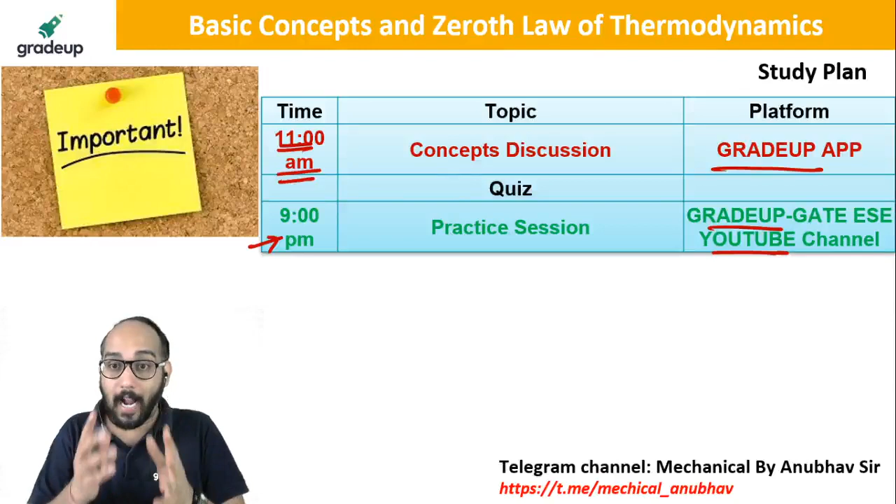Let us begin with the question. Today we'll be talking on basic concepts. Direct questions from basic concepts are very rare, but you can always expect questions from Zeroth law of thermodynamics. So in this session, we'll mainly talk about one of the most important topics, which can be used in first law, and sometimes in questions which combine first law and entropy - that is work transfer. This important topic we'll also take up in today's session. Let us start our discussion with the first question.

Okay, so this is question number 1. Let us go through it and try to understand. It will look a bit big, don't be afraid of it. It's just that they have given you a lot of data, so all you need to do is process this data and try to solve this question.

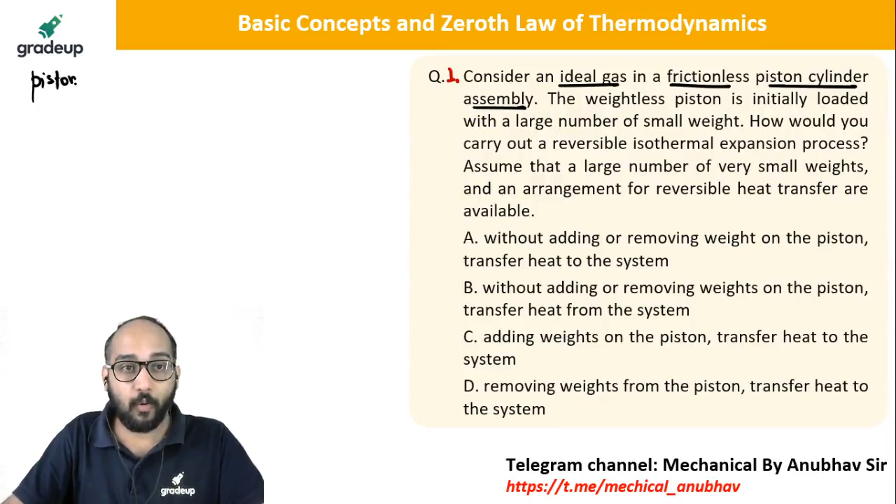Let us start. It says consider an ideal gas in a frictionless piston cylinder arrangement. As soon as I see it's a piston cylinder arrangement, I conclude that it is a closed system. Piston cylinder arrangement gives me a conclusion that it is a closed system.

Similarly, if it is frictionless, I can assume whatever process may happen can be assumed to be reversible. And what is the working substance?

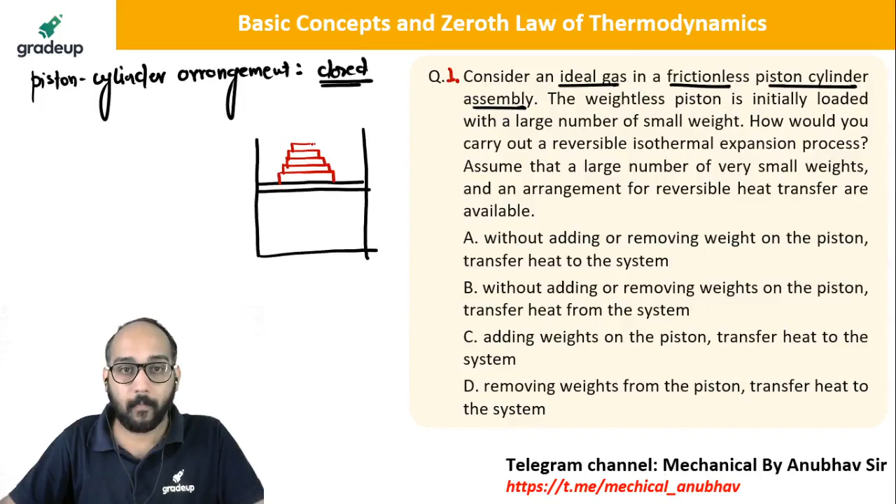Ideal gas. The weightless piston is initially loaded with a large number of small weights. So suppose this is the piston cylinder arrangement, and the piston is considered to be massless, and on this piston there are a large number of small weights, something like this.

Okay, how would you carry out a reversible isothermal expansion process? So this is what I need to carry out - a reversible isothermal expansion process. Assume that a large number of very small weights and an arrangement of reversible heat transfer are available.

What would you like to do? Would you add or remove weights, transfer heat? So transfer heat without adding or removing weight, simply add or remove weight, or without adding or removing weights, transfer heat from the system.

Now if you look from A to B, it is very important to observe what the option is. This is to the system, from the system. So direction of heat transfer is very important. Third, adding weights on the piston, transferring heat to the system. So it is now more specific, and removing weights from the piston, transferring heat to the system.

Now if you guys have attended the morning lecture at 11 a.m., we discussed this very important physical significance of isothermal process. If the temperature remains constant, what are the important points you can talk about? So isothermal expansion process is what we need to do.

So expansion means the volume has to increase. So from this initial state, what is the volume? The final state of the system, the volume should increase. So definitely the piston has to move in this direction.

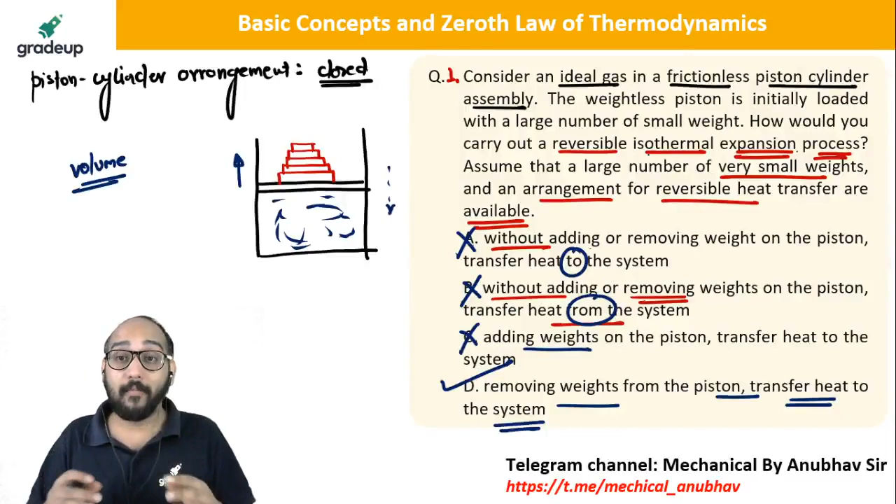Sometimes a question can be this easy. All you require is conceptual knowledge.

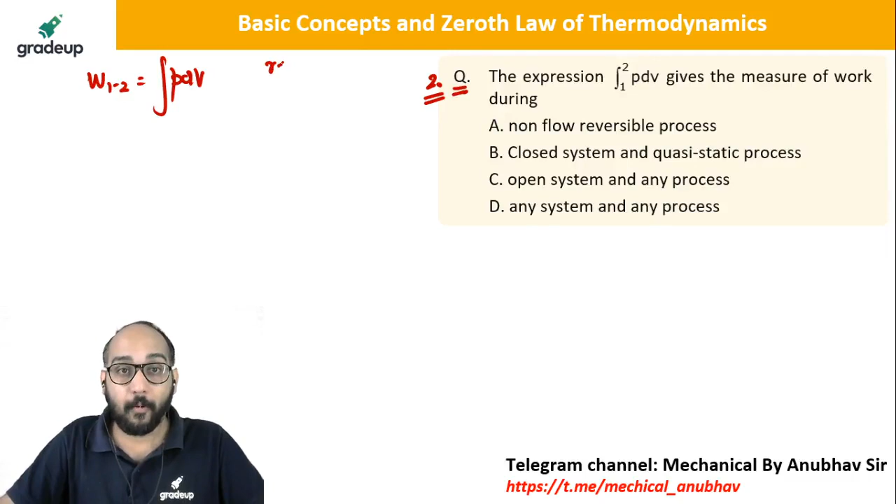It is valid when the process is reversible and undergoing in a closed system. The two big considerations are reversible and closed system. Which of the following matches it? Closed system is quasi-static reversible.

We have discussed that all quasi-static processes are reversible process - yes or no? Do all quasi-static processes are reversible process? The answer is no. But do all reversible processes are quasi-static? Yes. So I can consider this because all reversible are quasi-static.

Also, we have discussed in the morning class that, or you might be knowing, not necessarily that you have attended morning class, closed system mass remains constant.

Why? Because there is no mass transfer. So hence the closed system are also referred to as control mass. When they are referred to as control mass, they are also referred to as non-flow system. My dear friend, this is nothing but...

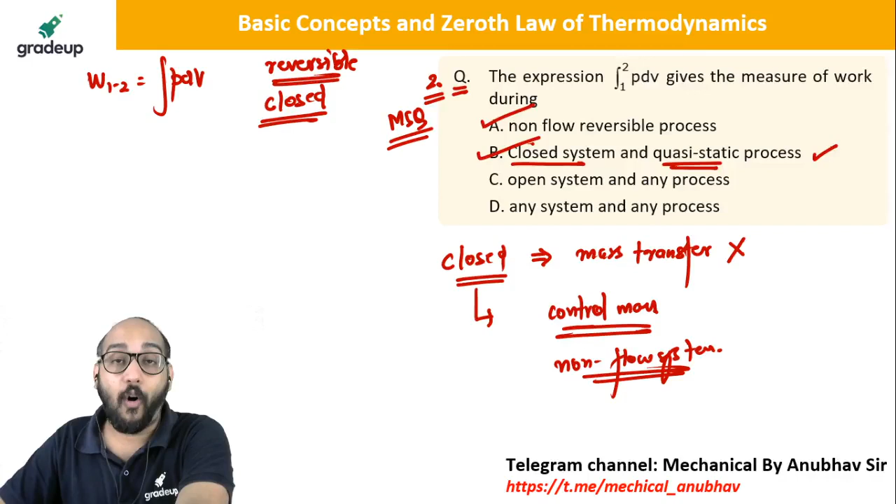This is an MSQ question. Okay, so both option A and B are correct. You might be thinking A, perfectly right. You might be thinking B, right. But A and B is the correct answer. This is an MSQ question. So you should always think about all the 4 options and try to eliminate them.

Next, let us now move to solve one question. Go through the question and try to think about it, how do we proceed to solve this question.

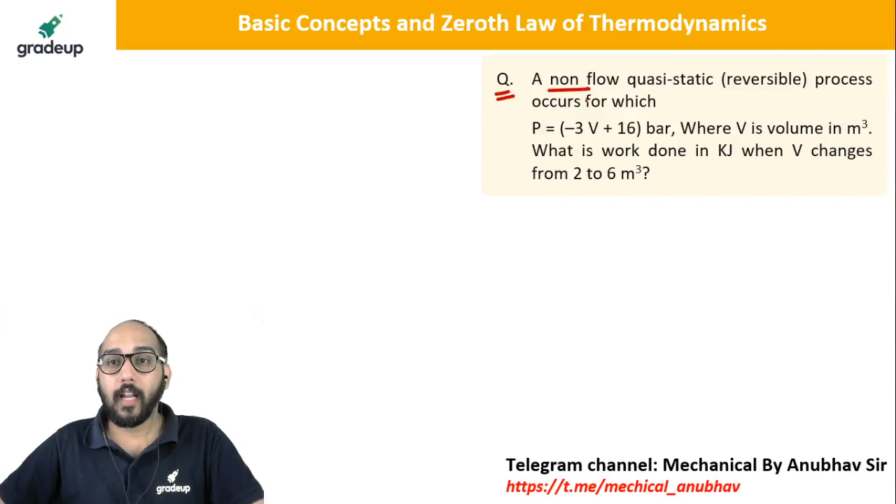It says that a non-flow quasi-static reversible process. So we have just discussed non-flow quasi-static reversible process. Work done is given as integral of PdV. Now in this case, the variation of pressure with respect to volume is given. Initial volume is 2, final volume is 6 meter cube. So V1 is 2 meter cube and V2 is 6 meter cube.

How do we solve? Do we know which is the process? If I don't know the process, I cannot apply the formula. So what is the way out? What is my thought process? This relationship - whenever you don't know about the process, try the general equation. Maybe you get the answer. So this is integral of the value of P, which is minus 3V plus 16, dV.

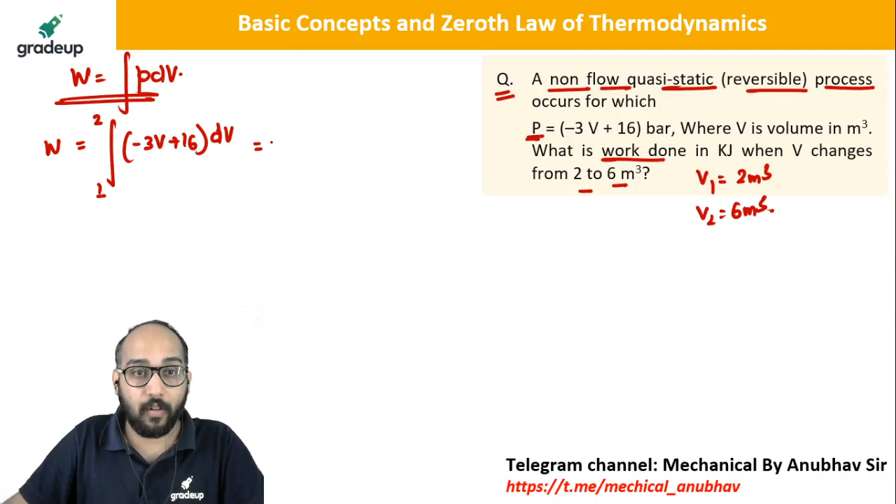Integral from point 1 to 2. What is this integration? If you do the integration, what do you get? Minus 3V square by 2 plus 16V, from 1 to 2. So if I put the values, what do I get? Minus 3 by 2, this is V2 square minus V1 square, plus 16 of V2 minus V1.

Now if I put the values, this is minus 3 by 2. V2 is 6, so 6 square is 36, minus V1 is 2, so this is 4, plus 16 of 6 minus 2. So this becomes 36 minus 4 is 32. So this is minus 3 by 2 into 32, plus 16 into 4. So this is 16 into minus 3 plus 4. So the answer that you get is plus 16.

But my dear friends, the calculation is easy, the relation is very easy. So answer is 16, sir. I'll put the value 16. Okay, done. Look, we have solved it. We have applied ourselves very clearly, very correctly.

But at the last, we have done one mistake. And it is not a mistake, it is a blunder, my dear friends. Sir, what is the unit of this? What unit do I write? Is it joule? Is it kilojoule? Is it bar? Is it what?

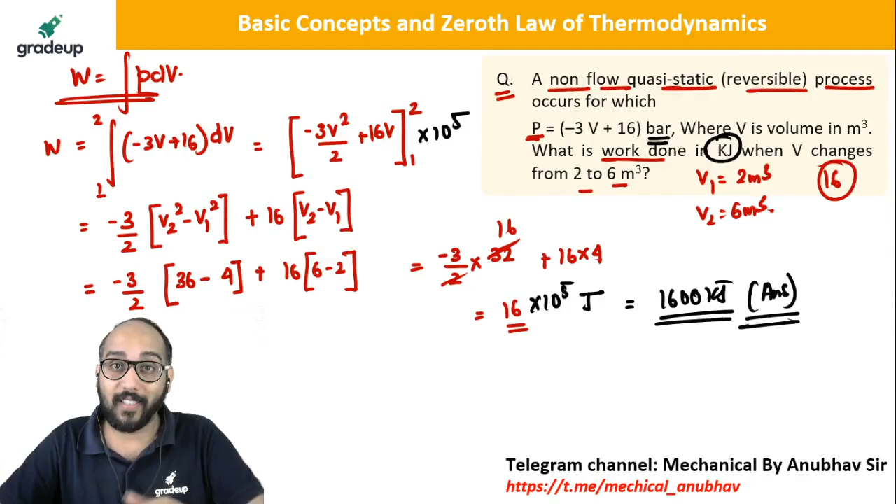So here bar is 10 to the power 5 factor. Okay, so this 10 to the power 5 factor will continue and you will get till this point. When you multiply as 10 to the power 5, the answer is joule. But what do you need in kilojoule? So answer is 1600 kilojoule. Okay, so great. So this is one form of work transfer, and we'll use it a lot in the upcoming session, maybe in today's session also. So wait and watch. Next.

So this is a very beautiful direct question from the basic concepts of thermodynamics, asked in GATE 2019, and you won't believe it is a 2-mark question. And they say, sometimes it was just a surprise out of the blue, suddenly they asked something which is not normal, and many students were stuck. Sir, is it this easy a question or am I missing some point? So in this dilemma, many students made a mistake. Many of them did it, but many of these students made a mistake also. Let us talk about it.

So if 1 mole of hydrogen gas occupies a rigid container with a capacity of 1000 liters. So there is a rigid container whose capacity is 1000 liters. So this is a rigid container, and inside this, say you have hydrogen gas. Okay, so this is H2.

What is the volume of this container? The volume is 1000 liters. Now can you tell me 1000 liters is how many meter cube? Because I don't deal with liters, at least in thermodynamics. I need to convert it into standard units. 1000 liters is how much? 1 meter cube. So the volume of the tank is 1 meter cube.

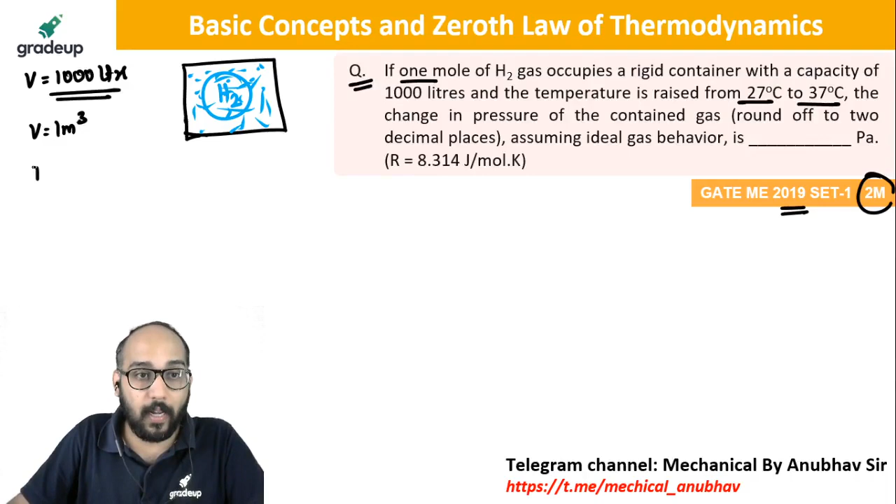So volume of hydrogen is also 1 meter cube. The temperature is raised from 27 to 37 degrees Celsius. So temperature T1 is 27 degrees Celsius, which is 300 Kelvin, and temperature T2 is 37 degrees Celsius, which is 310 Kelvin. The change in pressure of the contained gas, round it off to 2 decimals, assuming ideal gas behavior.

So what is the change in pressure? Change in pressure means I need to calculate P2 minus P1. This is what I need to calculate. And since it is given as an ideal gas, the first equation that strikes my mind is PV equal to MRT for an ideal gas. So if I want to calculate P2 minus P1, can I directly write this as MR times T2 minus T1 upon volume V? Since V1 is equal to V2, I can write it like this.

Now the problem here is I know volume, I know T1, I know T2, but I don't know mass and the value of R. If in this case, air as an ideal gas would have been given, then I can take the value of R as 0.287 kilojoule per kg Kelvin. But this condition is not given. It is not mentioned air, they have specifically mentioned hydrogen.

So this would be wrong, and this is the error that many of the students made, taking R as 0.287, because we have a habit: if nothing is given, we take R as 0.287. But here specifically hydrogen is mentioned, you cannot take the value of R as this. Then what do I do, sir?

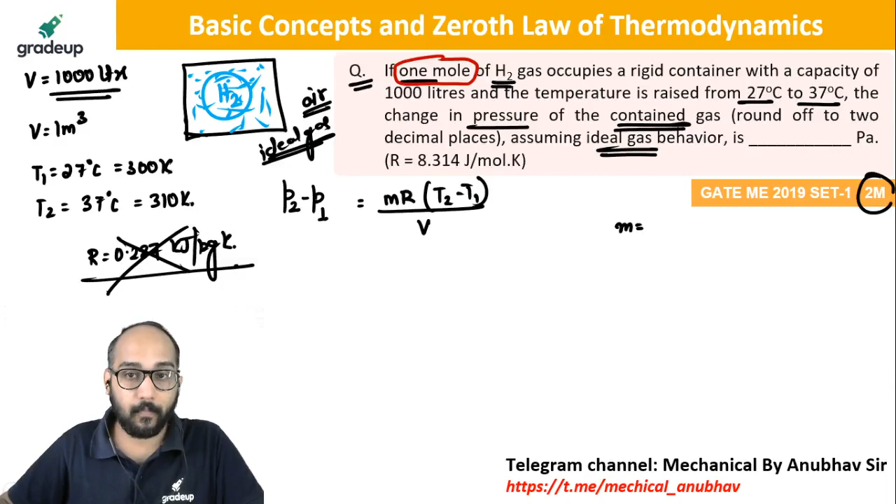So we go to the very basics of this. 1 mole is given. So the relation that I can use is, if you know it, recall it, if you don't, understand it now. Mass is given as the number of moles into the molecular mass. Number of moles is given as mass upon molecular mass.

So from here, what do we get? M is equal to number of moles into molecular mass. So if you want to calculate M into R, you write this as N into M into R, and this is nothing but the universal gas constant. This characteristic gas constant R is given as R bar upon molecular mass.

So these two fundamental points are being checked in this particular case, or many of you might already know that this relationship is directly valid. So just as a derivation, if anyone had a doubt, this is N into R bar into T2 minus T1 upon volume. Here this value of R is given as 8.314.

And here there was a lucky escape, and I'll tell you what. It was just by fluke, if somebody thought of something and it was lucky enough that it came out directly correct, I'll tell you what. The number of moles is 1. This is 8.314 into temperature difference of 10 upon volume 1. This is nothing but 83.14 Pascal, and that is your answer.

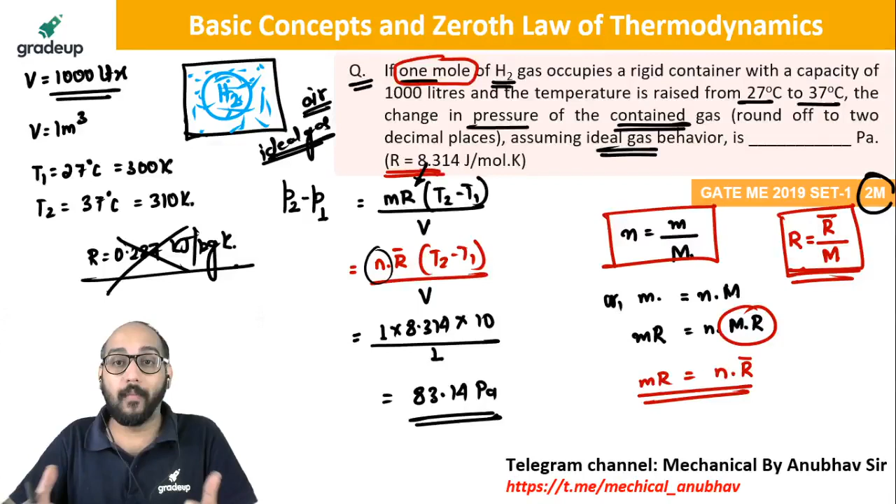Actually the number of moles was 1, some took mass as 1. R should be R bar, but the R value is given, so by luck, somebody used this value and got the correct answer. But we never know, my dear friends, that this concept next time can be used in a much more appropriate form, then no luck by chance. I hope you have got the concept.

Let's move on, next is a numerical type question. Let us discuss this. It says that a monoatomic gas undergoes an adiabatic process in which the pressure is increased by 1%, then the volume decreases by how much. So one thing first, in this question it is mentioned that the volume decreases, but in an MCQ type question, they can also give combinations where volume increases by some percentage or decreases by another percentage.

Okay, the first thing that you see, it is an adiabatic process with a monoatomic gas. If the pressure is increasing, you know what the slope is. In an adiabatic process, if pressure decreases, volume increases, or if volume increases, pressure decreases, they go vice versa. So in this case, if pressure is increasing, volume is bound to decrease.

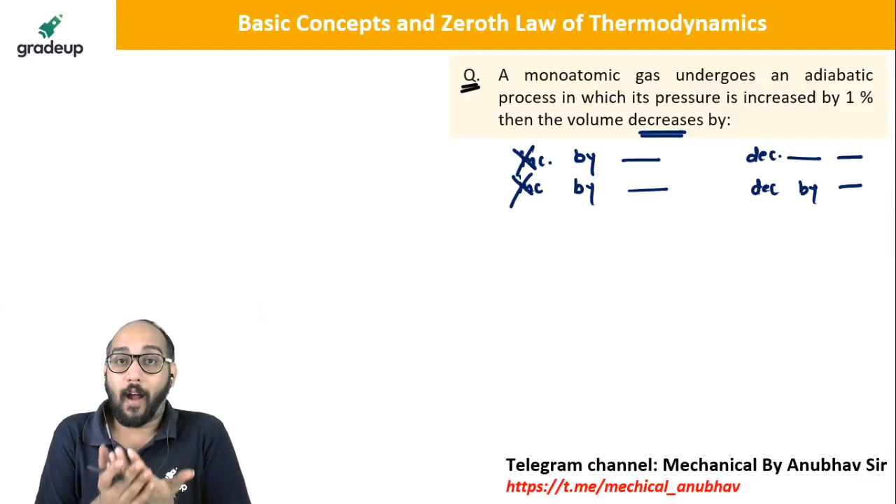So as soon as you see that volume increase option, eliminate it. These are small points that you have to always remember. You never know when this will help you. Let us solve this question.

Adiabatic process: PV to the power gamma is equal to constant. If I take log on both sides, this becomes natural log of P plus gamma natural log of V equal to natural log of constant. Differentiating, dP by P plus gamma into dV by V equals 0. From here, dP by P is equal to minus gamma into dV by V.

Now this data given increases by 1%. Percentage or increase means the increase value upon the original value - if you calculate change upon original into 100, you get the percentage. So increase upon original is nothing but change upon this. So dP by P is given as 1%. From here, if you want to calculate dV by V in percentage, what do we do?

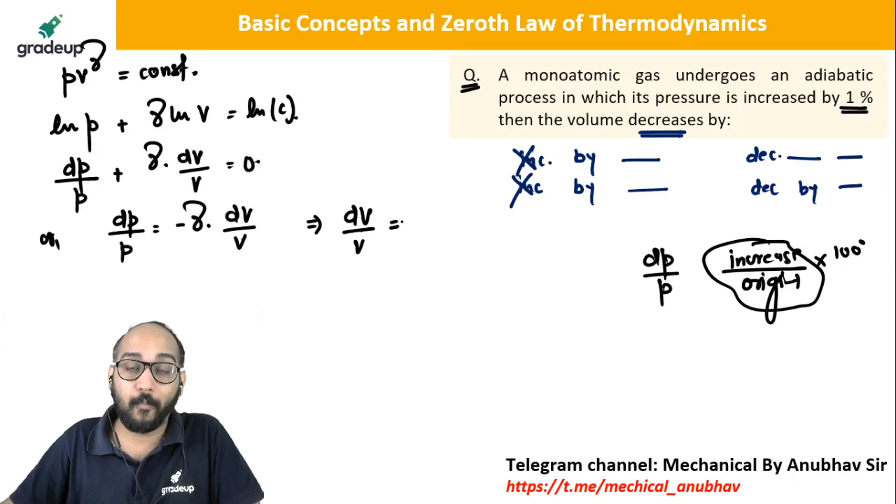So dP by P upon gamma with a negative sign. This negative sign indicates that volume is decreasing. We put the value 1 upon.

Now what is the value of gamma? It is given as monoatomic gases. I hope you remember that for monoatomic gases, the value of gamma is 1.667. For diatomic gases, the value of gamma is 1.4. And for polyatomic gases, the value of gamma is considered to be 1.3. If nothing is given, you take these values. If they have given you some data to calculate or a direct value, you observe that.

So this is 1 divided by 1.667. So this is minus 0.6%. This is your answer. So since they have already mentioned decreases by, in your GATE exam the value that you will type in is 0.6.

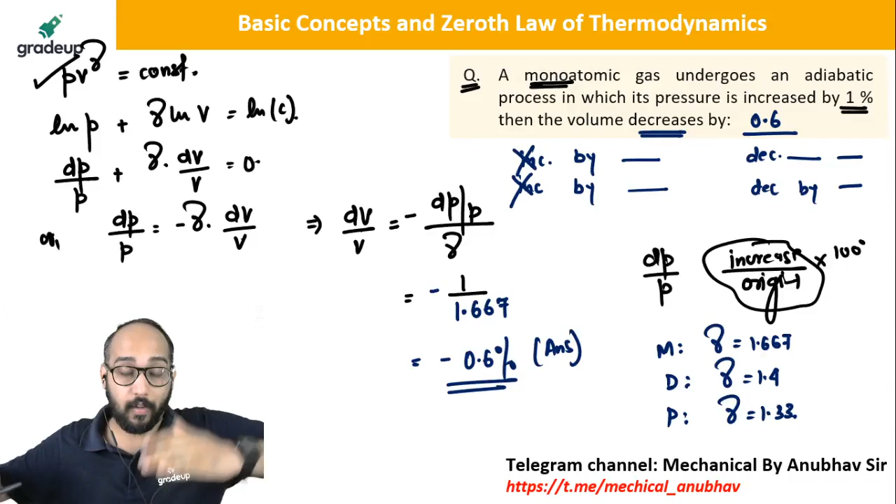Understood? So very basic question. What have we learned here? We learned the equation of adiabatic. We have also discussed that in an adiabatic process, slope is negative, which means if one value decreases, the another value - if one value increases, the another value decreases. Next, a very beautiful question, and this type is very much expected.

So you go through the question and see what are they asking.

The correct expression representing Z to be a thermodynamic property. Sir, I don't know - how many of you think that? Hello, are you seeing this question for the first time? Since this is being recorded, I won't know, but please do let me know in the comments. If you are someone seeing this question for the first time, after solving it please leave a comment - I'll check how you liked this question.

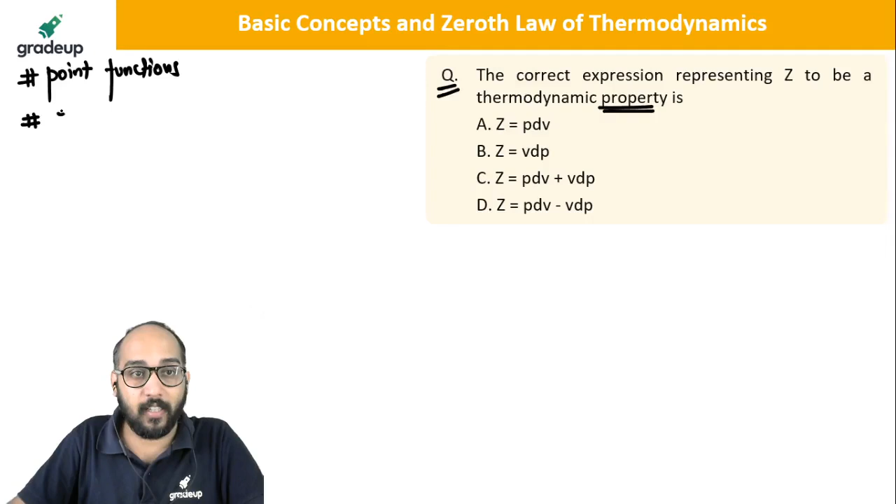Now, while doing the basic theory part, we have laid huge emphasis - I've told you again and again that this is very important - that if I say it is a property, property means these are point functions. Yes or no? All thermodynamic properties are point functions. And when they are point functions, they are exact differentials. Remember, I told you, these are exact differentials.

Now here, we will use a concept from mathematics to find out whether this Z is an exact differential or not. So any equation represented as m dx plus n dy - if it is represented like this, for Z to be an exact differential, for dz to be an exact differential, the condition is del m upon del y at constant x should be equal to del n upon del x at constant y. So if this condition is valid, then you say Z or dz is an exact differential. Hence, in thermodynamics, we can comment that it is a property of the system.

Now, if you look here, by looking at it I don't see it is in the form of mdx plus ndy. So obviously I'll have to calculate this, satisfy this condition for all four options. Try to satisfy - whichever satisfies would give me the answer. So I'll have to pick and choose if I am smart enough, and I know you all guys are smart enough too. So I see that this is not in the required form.

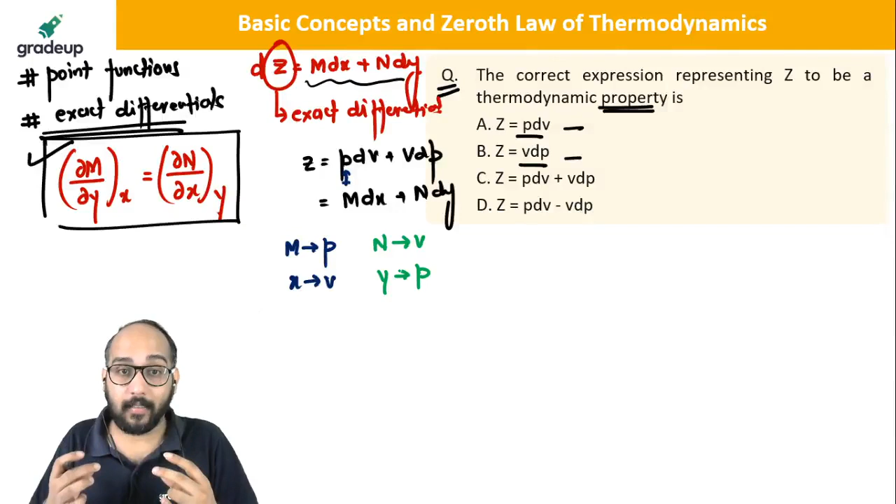Let me write and check. What do I have to prove? I have to check whether del M by del Y at constant X is equal to this or not. So if I try to calculate this, M is P. What is Y? Y is P. So del P by del P at constant volume. What value do you get? 1. Okay, this was left hand side.

Let us solve right hand side. Del N by del X at constant Y. N is V, writing V. X is V, writing V here. At constant Y, Y is P. This is also 1. So is left hand side equal to right hand side? Yes. So option C is the correct answer.

You will be saying, sir, you knew the answer, that is why you solved it. Let us talk about another one. Let us take option number D.

So this is given as PdV minus VdP. Compare with MdX plus NdY, this is what you need to compare. So on comparison, what do you get? M is P, X is V. On the other side, N is minus of V. So this is minus V. When you compare, this is minus V, and Y is P.

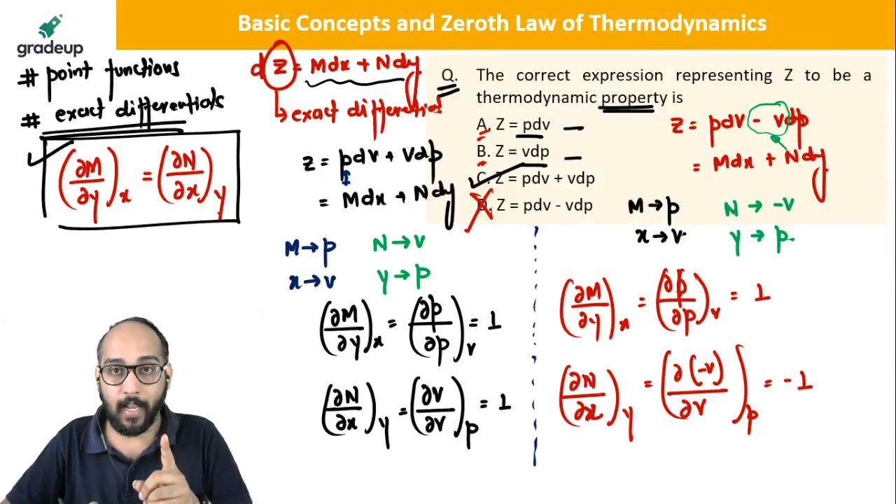Okay, you try it out for A and B, you'll get the answer. Please try it out and check whether you get it or not. Option C is the correct answer. So this was a very simple question. Next time they can give you a little difficult relation, but the thought process to solve such kind of question is this only. So please remember this, very much expected.

Now come to a very standard question for GATE exam. Very standard question. Helium in a piston cylinder assembly, closed system. What is the working substance? Helium, at 20 degree and 100 kilopascal, is brought to 400 Kelvin in a reversible polytropic process with exponent 1.25.

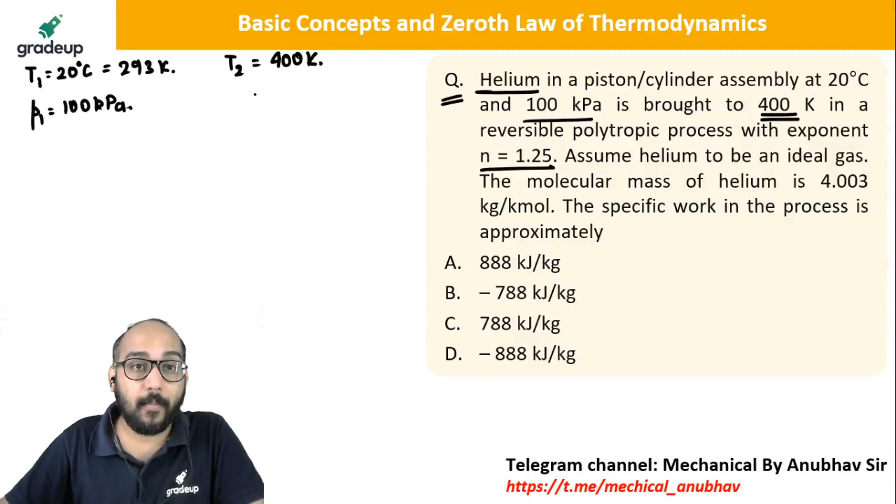The initial temperature is 20 degrees Celsius, which is 293 Kelvin, and pressure P1 is 100 kilopascal. The temperature is brought, T2 is brought to 400 Kelvin. Pressure I don't know, fine. It is a polytropic process, PV to the power n is equal to constant, where the value of n is 1.25. Assume helium to be an ideal gas having a molecular mass of 4.003 kg per kilomole.

What is the specific work in the process approximately? Now, I assume that you can solve this question. Would you like to solve it on your own or should I solve? I'll solve, okay, you continue parallelly. If you think you can solve, let us see whether you get the correct answer or not.

So it is a polytropic process. Work is asked, they are asking specific work per kg. The mass is 1. Now for a polytropic process, I know it is P1V1 minus P2V2 by n minus 1.

Now there are two approaches. One, a student who has worked very hard, knows all the concepts, but sometimes lacks problem solving ability. So what will he do? Sir, I know T1, I know T2, I know P1, I know n. Sir, I will calculate P2 by P1 is equal to what? Sir, T2 by T1, this would be n minus 1 by n. I can calculate P2, okay fine. So you get P2. What about V1, V2?

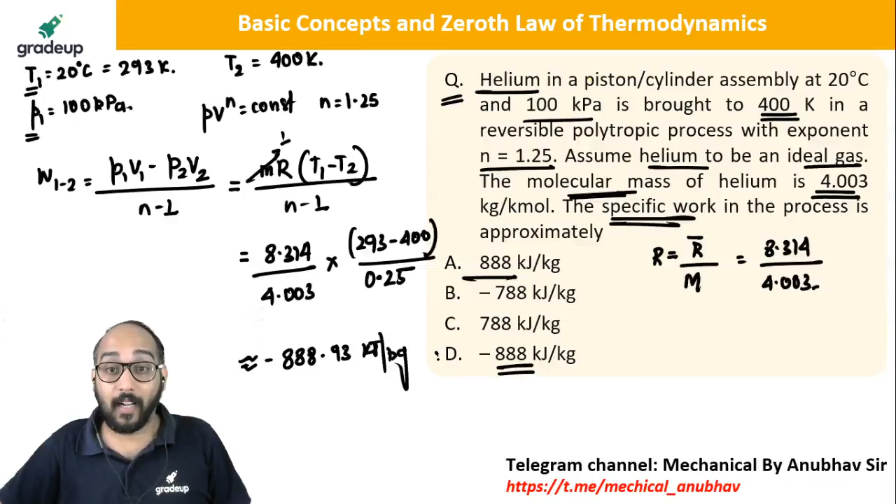If you make a mistake and write T2 minus T1, it's gone - you will get 888 and you'll be very happy thinking you're very smart, you've done it. But the correct option is option D. Understood?

Now, a very, very beautiful question. It's a slightly big question, you'll need some patience, but this is a type of question you always expect in a GATE exam, especially with the concepts of work transfer. Last time, not exactly 2021 but in 2020, a very beautiful question came on another approach like this - there they had used a spring. Last time a question did not come on this principle, but this year you never know, we are back with these kind of questions.

Okay, so two parts are asked. We'll try and calculate both these parts.

So the question says a piston cylinder arrangement as shown in the figure initially contains air at 150 kilopascal and 400 degrees Celsius. Sir, where is the figure? Yes, I don't see a figure.

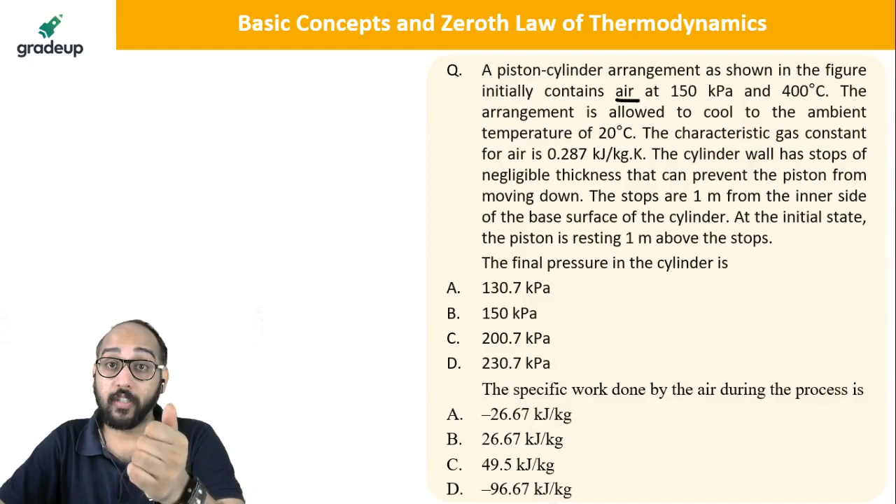Let me do a magic - figure. Okay, so air is inside in this piston cylinder arrangement. The initial pressure P1 is 150 kilopascal and the initial temperature is 400 degrees Celsius, so I am writing directly as Kelvin.

The arrangement is allowed to cool to the ambient temperature of 20 degrees Celsius. Okay, so the final temperature is 20 degrees Celsius, I'll just highlight it.

The characteristic gas constant R value is given. The cylinder walls have stops of negligible thickness that can prevent the piston movement below this point - so the piston can come down till this point, but it cannot go beyond this. The stops are 1 meter apart from the base of the surface.

At the initial state, the piston is resting 1 meter above the stops. So from here, the stops are 1 meter, from here it is 1 meter. Okay, this is the condition given.

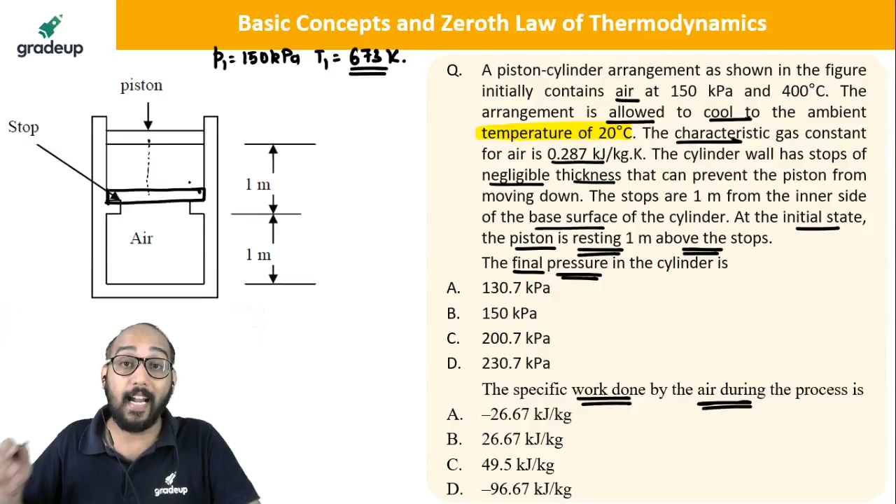So it is cooled down, from 400 degrees Celsius to a final temperature of 20 degrees Celsius. When it is getting cooled, initially the piston will come down, down, down, down till this state. So can I refer this state as 1 and this state as 2?

Beyond this, I don't know whether still heat is required to be discharged or rejected to achieve this final temperature or not. I don't know, but what I know is that beyond this, the piston cannot go. So when nothing is given, okay...

I can take 1 to 2 as a constant pressure process. It cannot be isothermal because temperature is decreasing, it cannot be adiabatic because heat is getting transferred, and it cannot be constant volume because the piston is moving. So logically, I would take this to be 1 to 2 constant pressure.

So if the pressure remains constant, P1 is equal to P2. If I take process 1 to 2 as a constant pressure process, and this is considered to be an ideal gas, can I write P1V1 upon T1 is equal to P2V2 upon T2? Since P1 is equal to P2, this cancels out, or I can write this as T2 is equal to T1 into V2 upon V1.

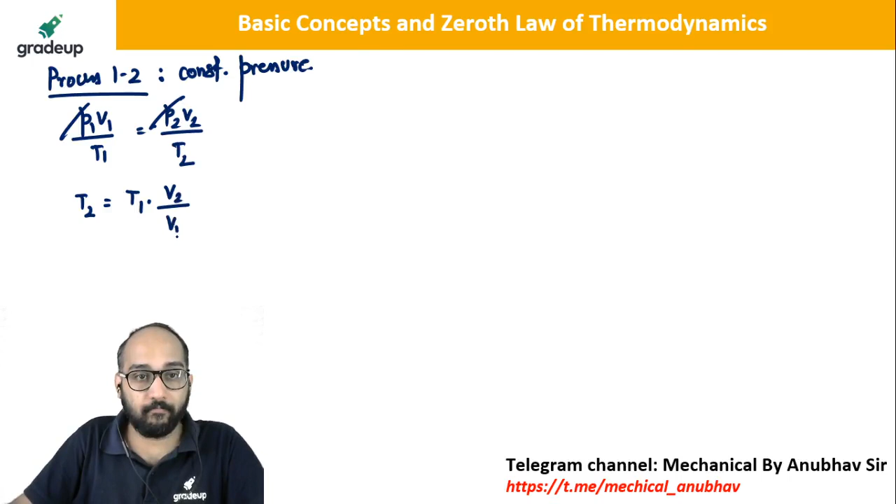Now I don't know what is the volume V2, V1. So this is a concept that was used in the previous year, as I said, 2020 May - how do you analyze the volume, or specifically when you want to calculate change in volume? Here we need to calculate the ratio of volume. So how do we go about it?

So what is volume V1? Volume V1 is this whole volume of the gas, this whole volume of the gas, this whole volume. So if I consider area A, then area into perpendicular height gives me the volume.

Yes or no? So for volume V1, can I write T1 is 673, and volume V1 is A into 2? Why 2? Because this is 1 meter, this is 1 meter. But for state 2, what would be the volume V2? Only this much.

Only this much, this is your volume V2, which is area into length 1 meter. This is area into 1, area cancels. Now how much is this coming? 673 divided by 2 - if you do the calculation, what do you get? 336.5

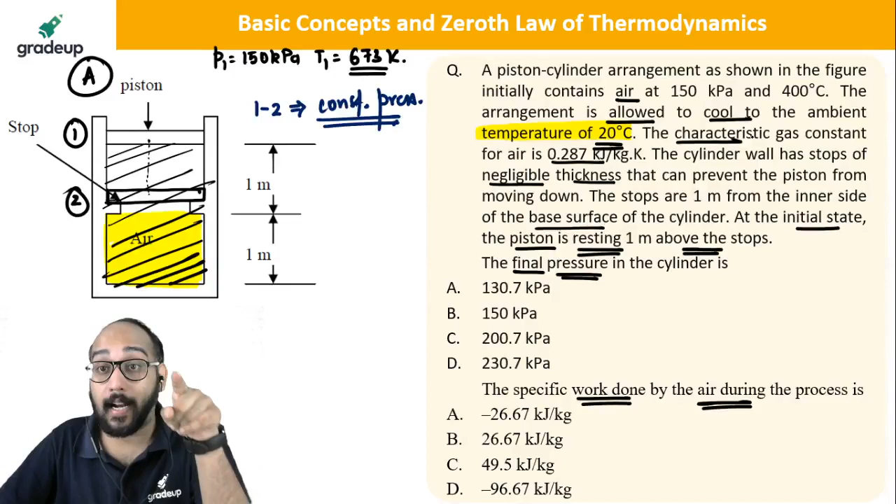Kelvin. And what I see from this value is that this is not 20 degrees Celsius. They have given you in the question that it is allowed to cool to the ambient temperature of 20 degrees Celsius. So further cooling has to be done, which means beyond this, whatever happens, it is a constant volume process.

So process 2 to 3 is what? Constant volume. If it is constant volume, I can write P2 V2 upon T2 is nothing but P3 V3 upon T3. V2 cancels out with V3. So from here, I can calculate the value of P3, which is nothing but T3 upon T2 into P2.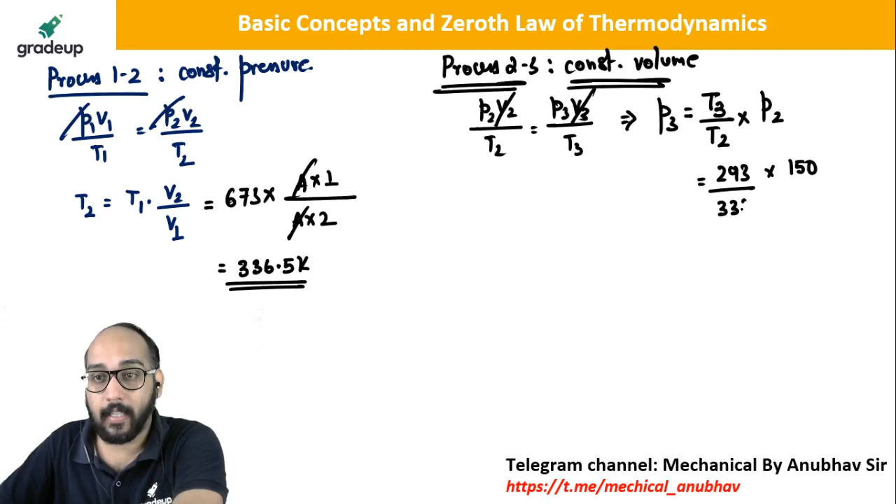Now P2 is equal to P1, so it is 150 kilopascal. Now what is the final temperature T3? 20 degrees Celsius, so this is T3 final state. So T at 20 is 293, and this value is 336.5. So very quickly, come on, calculate and write.

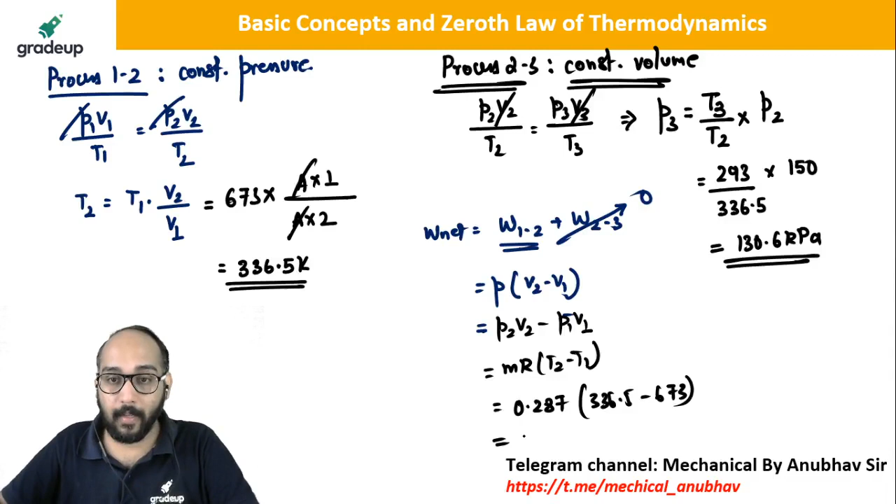336.5 minus 673. How much do you get, my dear friends? Minus 96.57 kilojoule per kg. And what does the negative sign indicate? That work is done on the system and not by the system. Minus 96.67, option number D is your correct answer.

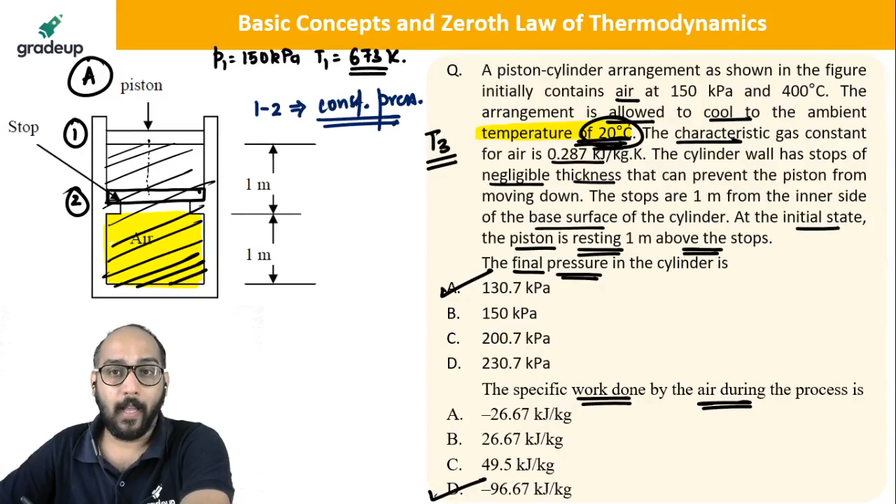Okay, so these are a few questions on work transfer. Let us now shift our focus to zeroth law of thermodynamics. Okay, so we all know what is zeroth law of thermodynamics.

A equal to B, B equal to C, so A is equal to B. Okay, so A is equal to C. The physical significance we have understood. Let us try and apply this to solve a question on numerical. So go through it.

The thermometric property X - so we have understood, we know what is thermometric property. X of a thermometer varies with temperature T. And what is the relationship? T is equal to AX square plus B. We know that to measure temperature, first we need to measure thermometric property which is dependent on temperature, and that property is known as thermometric property, and this whole principle is known as thermometric principle.

Now the value of X in centimeter is given at two different points, at ice point and at steam point. So at ice point, 0 degrees Celsius, and steam point, 100 degrees Celsius, the value of X is 5 and 20 centimeter respectively. So what is the temperature when this thermometer is giving you the value of thermometric property as 15 centimeter? What is the temperature of this body?

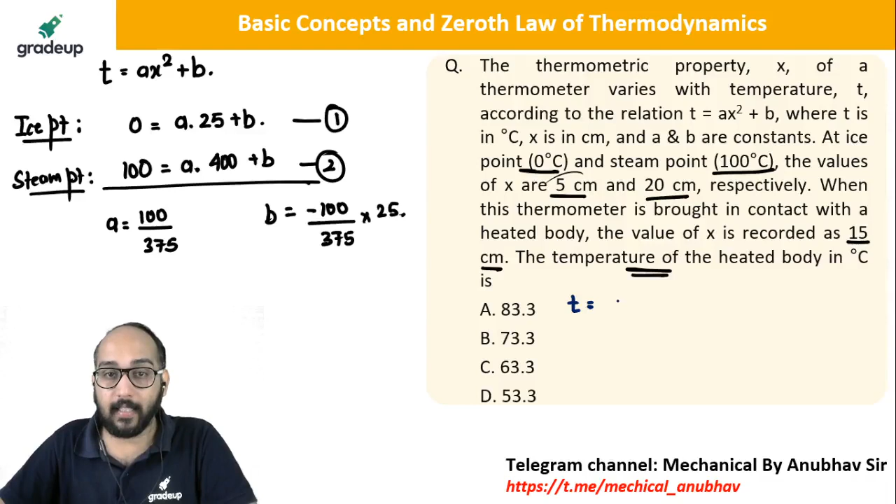So A is 100 upon 375 into X square. X this time is 15, 15 square is 225, plus B value is minus, so I'll directly write it as minus 100 upon 375 into 25. This is nothing but 100 into 200 divided by 375.

This is what you need to put in your virtual calculator to get the answer. Don't just calculate the value of A in decimals, B in decimals, then put the values - you're unnecessarily increasing complications for yourself while solving. In the exam it's very important how you handle data values while solving. So this answer would be 53.3, if I'm not wrong. Yes or no? 53.3 degrees Celsius.

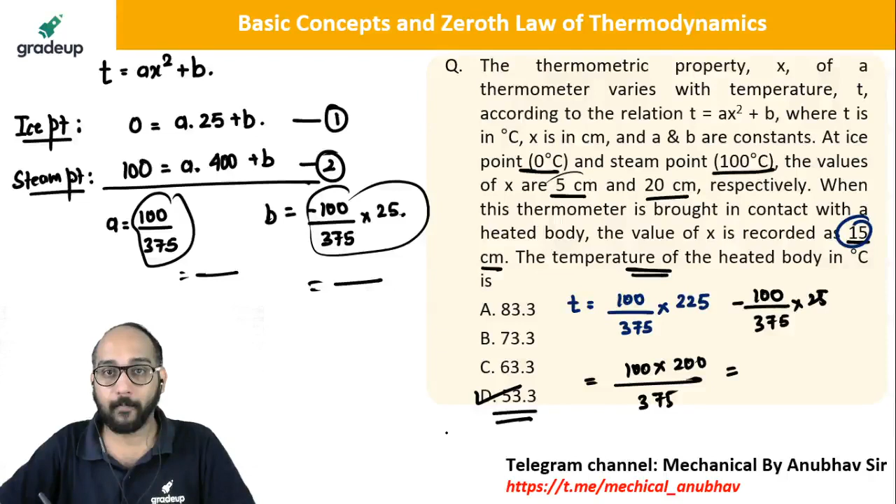Cool, so now 2 questions from my side as your assignment. You can write the answers in the comment section, or if not, in tomorrow's class we'll have an interaction, and we'll discuss it if you have a doubt.

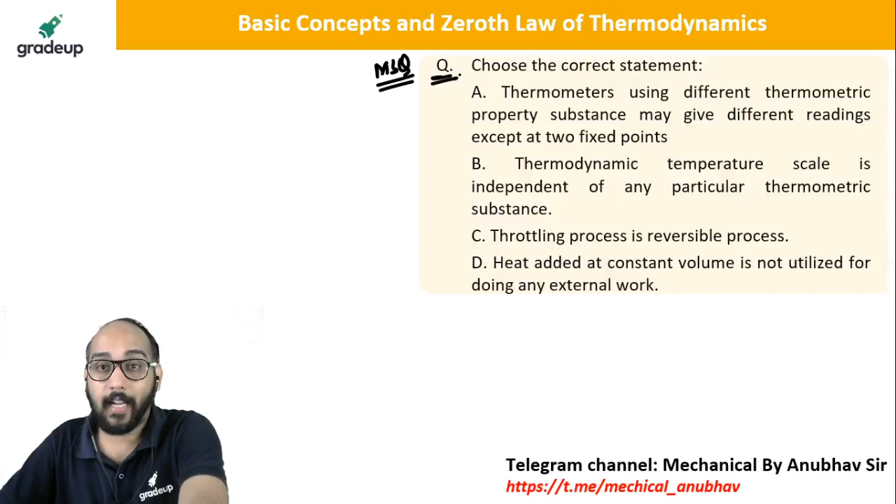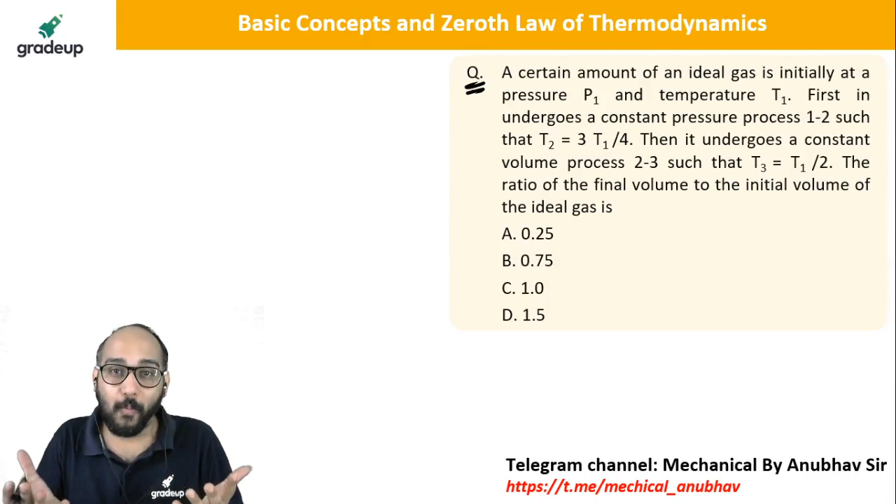Just to give you a heads up, this is an MSQ question, so multiple answers are correct, and you think about this question. It looks big, maybe dangerous, but after solving you will just understand. Made it cool, right? Okay, so these 2 questions are from my side as part of your assignment.

So these were a few questions on basic concepts and zeroth law of thermodynamics.